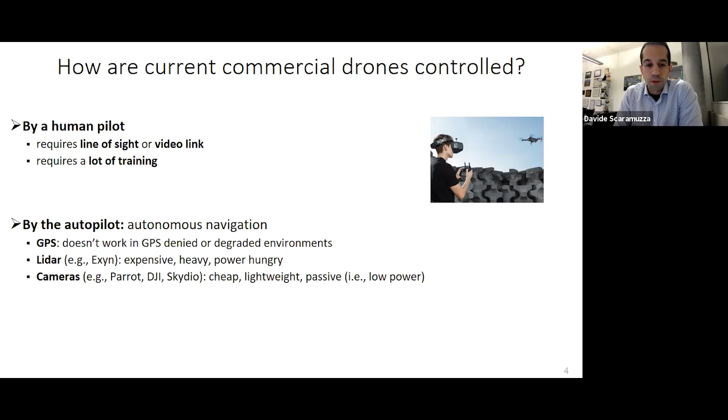That's the reason why over the past 10 years I've been working on vision-based autonomous navigation of drones. One of the most important things for us researchers is to find a passion that drives our research.

My motivation to work on autonomous flying robotics has always been to build machines that can one day be used to autonomously search and rescue people in the aftermath of a disaster. I'd like to do this for two reasons. First, because I come from the center of Italy, a region mostly impacted by earthquakes in past centuries. Second, because I consider search and rescue robotics one of the toughest fields in robotics.

Another important thing about search and rescue robotics is that it's very important to fly as fast as possible, for two reasons. First, because any time wasted can be fatal for the victim. Second, by flying faster, drones can cover more search area within their limited battery life.

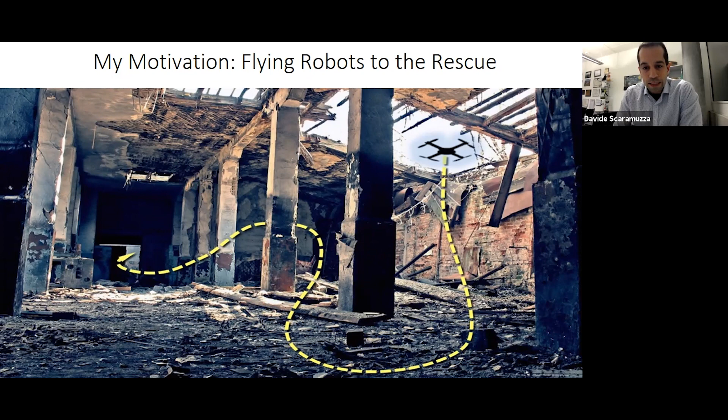Flying fast is actually the leitmotif of this talk, which is about agile flight. But before I go into the details, I want to review a little bit the last 10 years of progress on autonomous vision-based agile flight.

The first demonstration of autonomous goal-directed navigation of drones, non-reactive, using onboard sensors and computation, was done within the European project S-Fly, which I had the pleasure to coordinate. At that time we were flying very slowly. Here you see Laurent Kneip acting as safety pilot in case something goes wrong, using a fishing rod to safely secure the drone.

At that time we were running the computation off board on a laptop computer placed on the floor of the gym, and we used an onboard camera streaming images via a 20-meter long USB cable. That was the first demonstration of visual SLAM-based navigation of drones, between 2009 and 2010.

Then what happened? In 2015, DARPA launched a full program on fast and lightweight autonomy using only onboard cameras and computation, called DARPA FLA, fast lightweight autonomy. I was fortunate to be part of this program, in the team led by Vijay Kumar from UPenn. Within the FLA project, we demonstrated the first high-speed autonomous flight, up to 10 meters per second.

Where do we stand today? So today, in 2020, autonomous vision-based navigation has become a standard tool in several products, such as the Skydio drones, the DJI drones, as well as in the NASA helicopter just sent to Mars, supposed to land there in February next year. We are living in very exciting times.

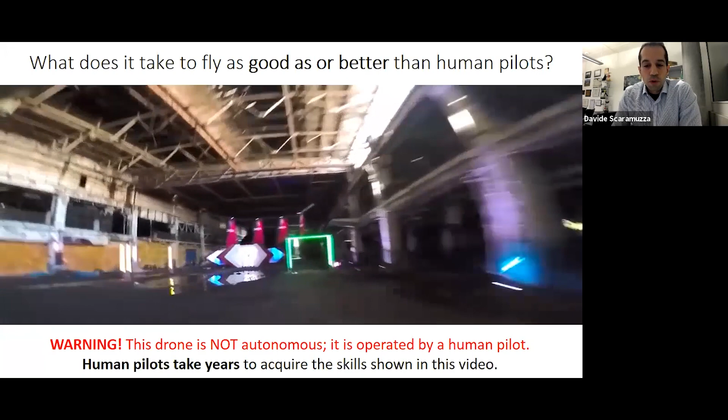But at the same time, as a researcher, we need to ask: what is next to do for us? I think the next challenge is to make autonomous drones fly as good or even better than human pilots. If you look at the performance of autonomous drones today, they are still far from the performance of human pilots in terms of speed, versatility, and robustness.

Look at this video, for example. Human pilots take years to acquire the skills you see here. This raises the question: can we build an alpha pilot that can fly drones as good or even better than human pilots? This is both my dream and the goal of my research lab.

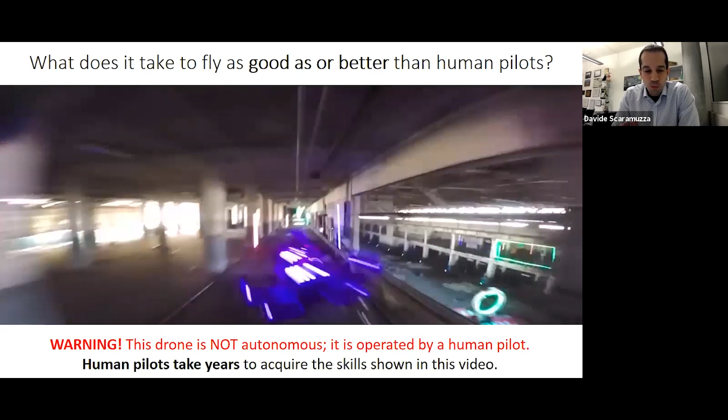And if we are successful, one day I would like to demonstrate a drone that can beat the best human pilot at drone racing competition, as well as in acrobatic maneuvers.

But you may wonder, why bother about agile flight? Why does it matter to us all today? Well, if drones can fly faster, it means they will be able to cover longer distances. Drones at the moment are very limited by their battery life—they can only fly for 10, 20 minutes, which restricts their use in many applications.

By making drones faster, the hope is that they will be able to fly longer distances in the same time. This is crucial for many applications that matter to us all today, like search and rescue, delivery, and inspection. But there's an additional reason: agile flight is, in my opinion, a really difficult problem to solve because it raises fundamental challenges for robotics research in terms of perception, planning, and control.

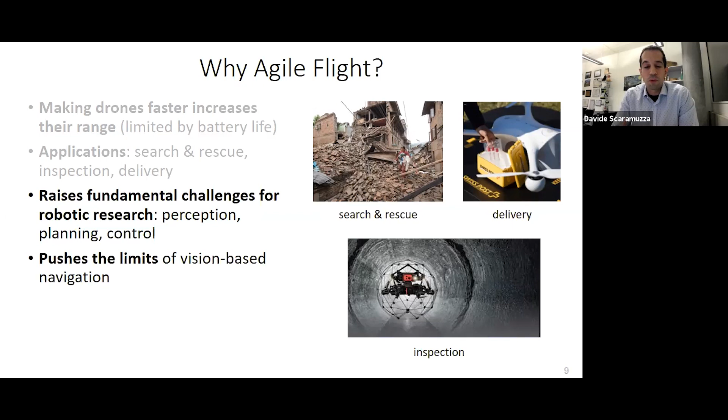After all, our goal as a community is to push the limits, and I think that to push the limits, we really need to work on really hard stuff. So at my lab, we want to push the limits on vision-based navigation. I think agile flight is one of the most exciting, but also one of the hardest challenges for robotics for the next decade.

Of course, there has been plenty of related work on agile flight. A very good exercise when you approach a new field, and this is actually a message for young PhD students, is to try to plot all the research papers on several axes. Here I chose speed and agility on the horizontal axis, and prior knowledge or use of external sensors on the vertical axis.

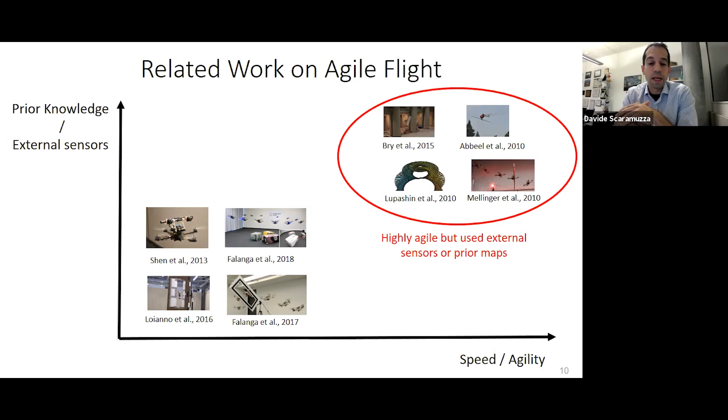If you look at the early works on agile flight, just to mention a few, there's the pioneering work by Andrew Ng and Pieter Abbeel on using reinforcement learning for acrobatic helicopter flight, the work by Bry and Nick Roy on flying a fixed wing in a garage, and the work by Lupashin and Raffaello D'Andrea, Daniel Mellinger and Vijay Kumar. The common denominator between all these approaches is that, yes, they were very agile, but they used external sensors or a prior map.

On the other side, more recently, in the past five to seven years, we have witnessed the rise of onboard sensor-based autonomous agile navigation. However, if you look at the performance in terms of agility, this is actually smaller than the agility that can be reached using external sensors or prior maps.

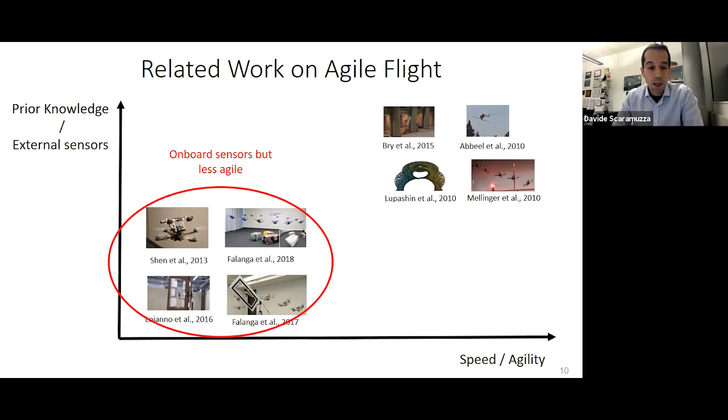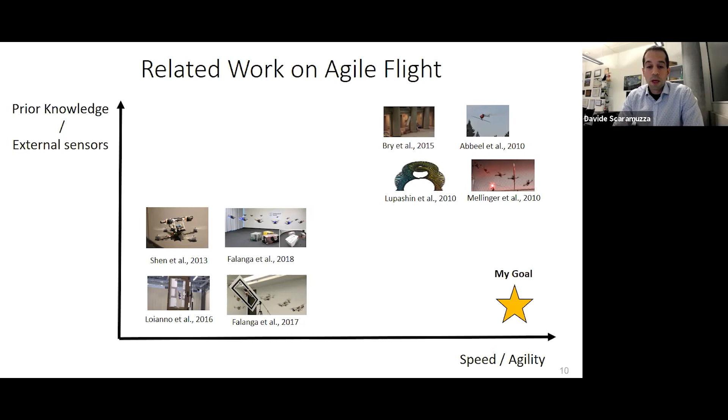So where do we want to stand? We want to stand basically at the bottom right of this plane: a system that is super agile in the future and also uses as little prior knowledge as possible, only using onboard sensors. That's the goal of my research, and also what I think the goal of the community should move toward. However, to achieve this goal, there are many challenges to work on.

Here I'd like to summarize the research challenges that I'm working on, but also that the research field is working on. Last week we organized the 6th International Workshop at IROS on autonomous agile vehicles, among which drones, and we identified these as the key research topics to address at the moment.

The first research problem is coping with inaccurate models of the sensors, of the actuators, of the environment, and physics. One solution is, for example, tight coupling of perception and action. This is a solution to this problem, but it also becomes a new research challenge, because how can you do it well?

Another problem is reducing latency, because if you want to fly faster, we need faster sensors and algorithms. Regarding faster sensors, there is now a plethora of novel sensors like event cameras and focal plane sensors like the SCAMP, which offer new opportunities. There are also new actuators that promise to lower the time constant compared to standard actuators and have much more efficiency.

There's also another big challenge: if you want to work on agile robotics, you're going to destroy a lot of robots. This is important, otherwise the field cannot progress. But if you destroy robots, it means your work is going to be very expensive and you're going to need a lot of engineers. It's also very unsafe, because you could destroy the environment and potentially hurt yourself and your research. So we don't want to do that.

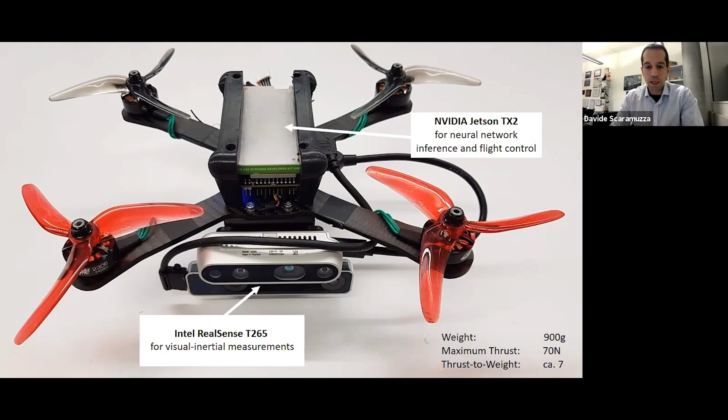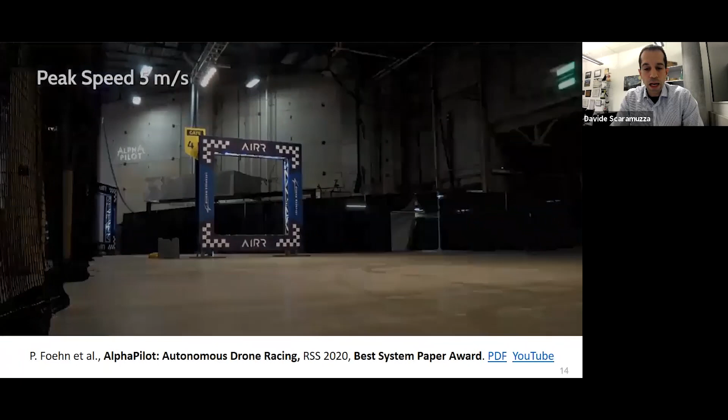Let's now move on to the first topic, autonomous drone racing, starting with a video. In autonomous drone racing, a drone has to autonomously navigate a race course consisting of several gates in the least possible time. What you see in this video is our drone's performance in the 2019 AlphaPilot Drone Racing Challenge, where we ranked second among 400 participants worldwide. Our drone was reaching peak speeds of up to 5 or even 8 meters per second in some cases.

Now, how does autonomous drone racing actually work? It consists of two steps. The first is to plan a global trajectory that minimizes execution time from start to finish - we call this the minimum time global trajectory. The second step is to execute this optimal trajectory, and executing it as accurately as possible is actually the hardest step, because any deviation from the optimal trajectory will cause the drone to underperform.

What are the main causes of these deviations? Mostly drift in visual odometry or visual-inertial odometry, and inaccuracies in our models of the actuators and of the environment. Because of this, it's very important to tightly couple perception and control. This is often said at conferences, but what does it actually mean to couple perception and control, and why is it so important, especially for drones? In fact, it's less important for self-driving cars.

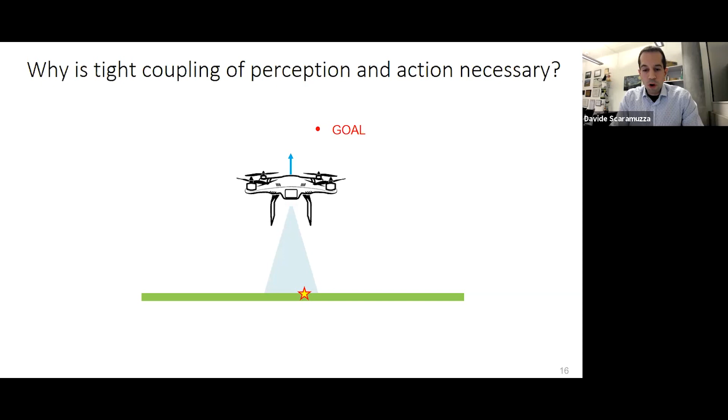Look at this very simple toy example. Consider this drone - assume it's a vision-based drone localizing itself with respect to some point of interest, denoted here by the yellow star. If this drone wants to reach a certain goal position, it has to point its thrust vector toward the goal. However, by doing so, it has to rotate, and by rotating, it loses visibility of the point of interest - the features it was using to hover, if that was the task.

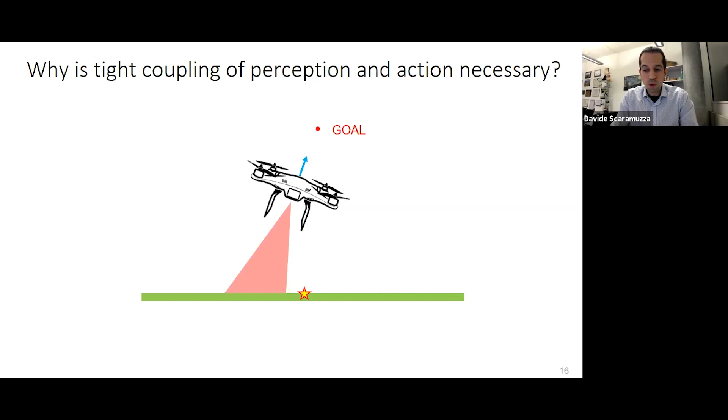So to solve this issue, we need to create a synergy between the perception and action loops - what we call perception-aware planning and control. This is super important. We humans do this all the time - when you grab a cup, when you pass through a door - but it's less obvious for robots. This perception-planning-and-control coupling is even more important for drones, because they rely on visual cues in order to navigate.

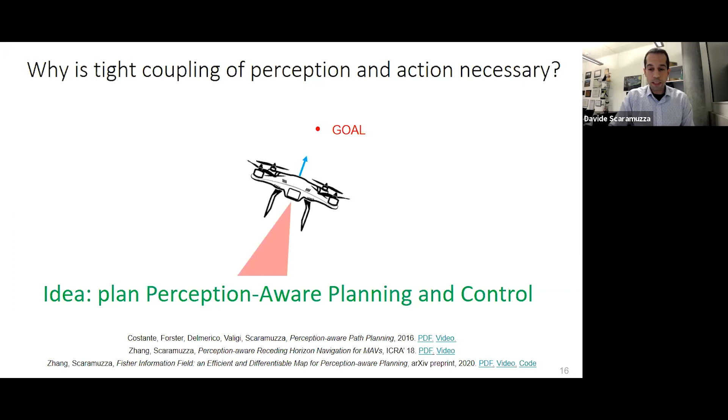Now, how can we solve this? We've been working on this perception-aware navigation for quite a lot of time now. One of the most important things is to use a tool that can already bridge some gap. So we decided to exploit model predictive control because it's a tool that allows you to bridge the gap between planning and control.

What we actually did is adapt model predictive control in a way to make it perception-aware. How did we make it perception aware? We combined some classical action objectives with some perception objectives.

What are the action objectives? They are, for example, to follow a given reference trajectory and stay as close as possible to it, as well as to satisfy the under-actuated system dynamics and respect the actuator's limits in order to not saturate the motors.

Perception objectives are, for example, to maximize the visibility of a point of interest. If you navigate through a track in drone racing, you want to constantly look as long as possible towards the next gate. But you also want to minimize its motion blur, so there is something to do on the image plane as well.

So here we define the perception objective. In this case, we want to minimize the projection of the center of a gate's distance from the center of the image, but we also want to minimize its optical flow speed, because by doing so we hope to minimize the motion blur.

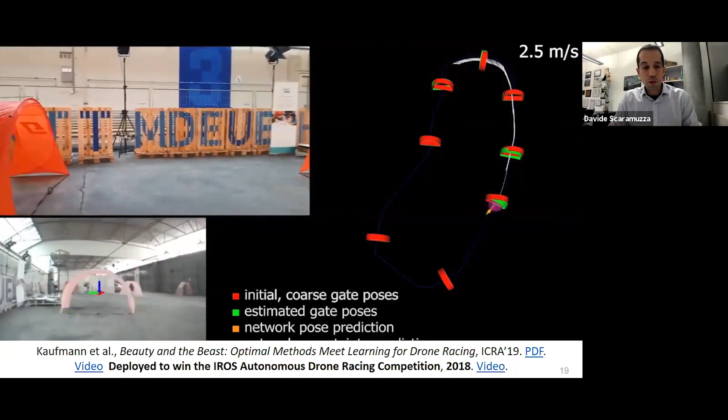Now let's move to the real-world results. This is already impressive to see: our policy trained in simulation was able to generalize to an unseen real world, which is exactly what you see in this video. So what do you see here? First, on the top left side, third-person view, you see our drone navigating a bit slowly here on a racing track.

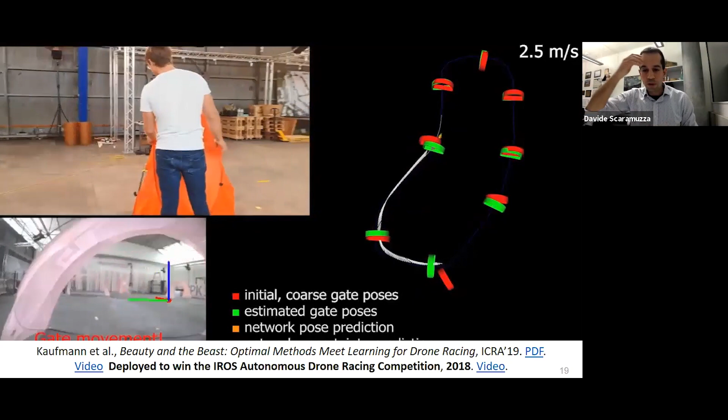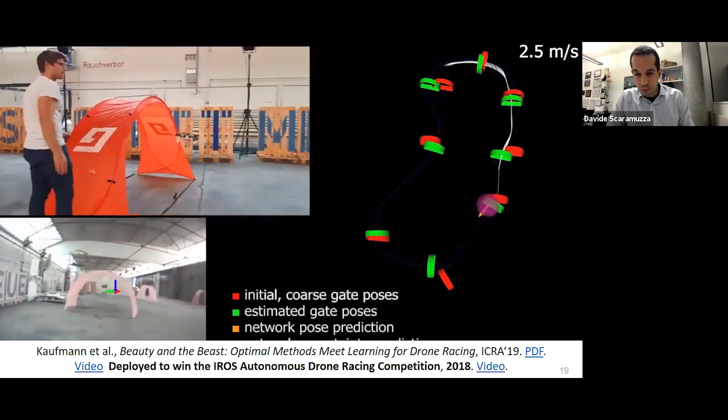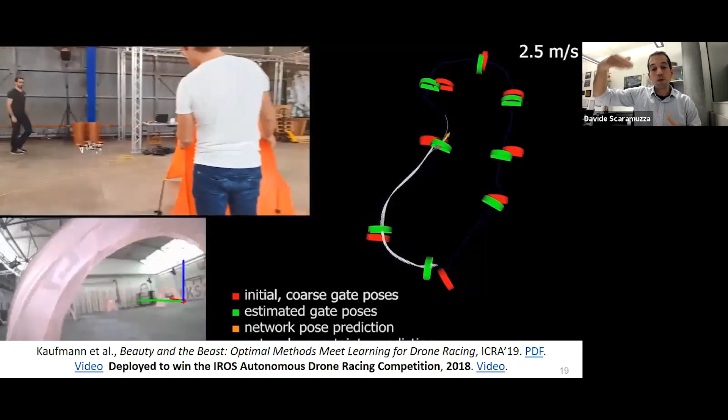What you see on the right is actually what is happening in the background. You see in green the predicted gate poses from the neural network, together with their covariance, marked in purple. As the network exits a gate, the covariance is pretty big because you are far away from the gate you're trying to predict. But as you approach the next gate, the covariance shrinks, which is in accordance with our intuition.

What are the red gates? The red gates define the prior map.

So the point is that we have a Kalman filter that fuses optimally the information coming from onboard visual inertial odometry with the position of the gate poses coming from the neural network. And then we have the perception-aware model predictive controller that executes the trajectory, making sure that at each instant of time the quadrotor looks at the next gate.

So it's perception-aware. What you saw on the bottom left video is basically the first-person view, and those three axes represent the projection of the relative pose of the gate into the camera view.

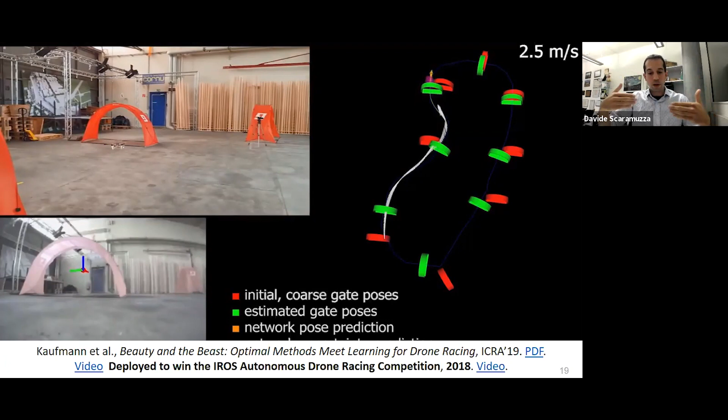Okay, now I want to move to another research topic that we're working on, which is how to perform autonomous drone acrobatics. Remember my big dream was also to make a drone able to get closer to the performance of human pilots, also in terms of acrobatic maneuvers.

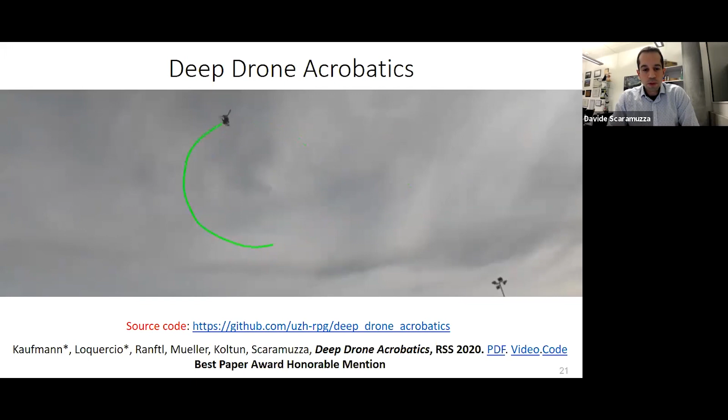This is work that I did in collaboration with Vladlen Koltun's group at Intel, published at RSS this year. In this paper we show deep drone acrobatics. We showed for the first time that a vision-based quadrotor with only access to onboard sensing and computation is capable of flying acrobatic maneuvers with accelerations of up to 3G, close to what the best human pilots can achieve.

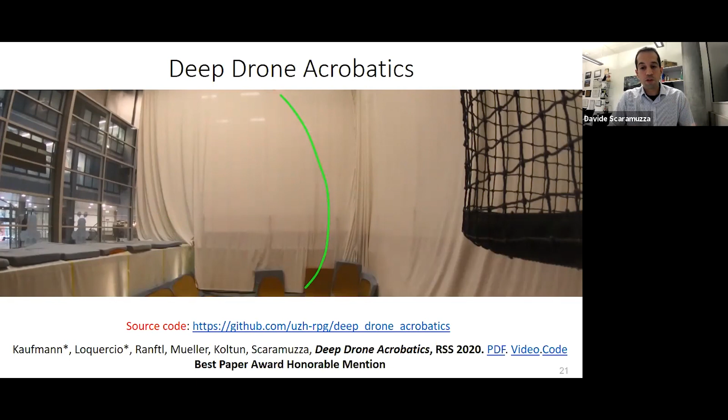Previous researchers had attempted these acrobatic maneuvers, but they only succeeded using either GPS or motion capture systems. To the best of our knowledge, this was the first work done using onboard sensors and computation. Now, the traditional approach to control drones typically relies on separation of state estimation, planning, and control. This is not the approach we opted for in this work.

Why is that? There are 5 reasons why we opted to learn an end-to-end sensory motor control policy. First, if you use the traditional architecture, these modules—state estimation, planning, and control—are usually designed individually rather than conjointly, co-designed. There are problems with this, which I'll explain.

Second, these modules run consecutively rather than concurrently, while we know that in nature perception and action, as I said before, are actually coupled. Additionally, this modularity introduces latencies.

Third, each module is sensitive to errors in their internal models of the sensors, actuators, environments, and physics. This means small errors in each module will negatively affect performance in each subsequent module. Fourth, this architecture requires extensive tuning, especially for the control gains, especially at high speed.

This is much more relevant in the task of acrobatic maneuvers. And finally, fifth reason, it requires extensive expertise by the code developer, also called domain knowledge. To recap, all these problems I mentioned are detrimental for very fast and agile flights, such as drone acrobatics.

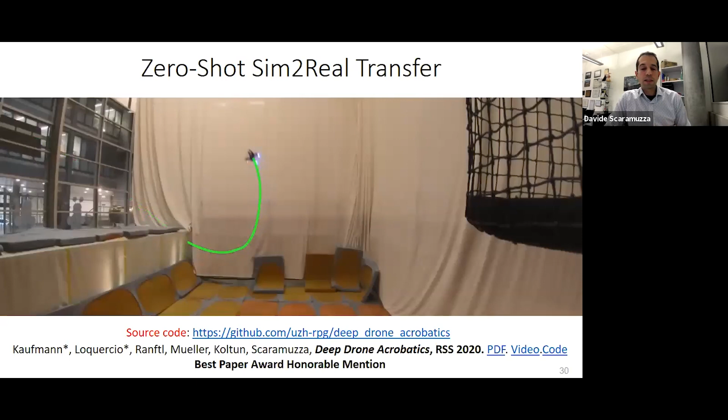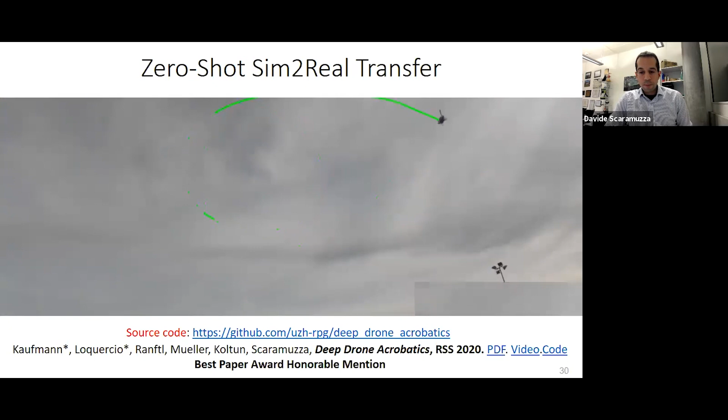In conclusion, our policy was able to generalize to different indoor and outdoor environments, but also to different physical drones. I would like to add that, thanks to this learned controller, we were able for the first time to demonstrate such agile acrobatic maneuvers fully autonomously with onboard sensors and computation. By the way, these maneuvers are also super difficult for human pilots, who take months to actually learn them.

So what are now the main takeaways of learning versus model-based controllers? To recap, so far I presented two tasks, autonomous drone racing and autonomous drone acrobatics, which relied on different approaches: a model-based controller for the task of drone racing, and a learning-based controller for the task of drone acrobatics. In this slide I want to summarize the key takeaways for robotics research.

In contrast to model-based approaches, I think learning-based controllers are more robust to drift in state estimation, do not require any tuning, and are also very easy to code. On the other side, I have to say that they offer poor generalization performance and are also difficult to interpret, and this is a general problem with networks in general. Therefore, I think future research efforts should focus on how to best combine the benefits of these two worlds.

Now, as you learned in this research, we used extensively simulation. What type of simulator did we use? We used actually a mix of Gazebo, Bullet, and the Unity engine, and we decided to gift this to the community. The simulator we use is called Flightmare, and it was just released open source a few weeks ago.

Flightmare is basically a new photorealistic quadrotor simulator, specifically meant for quadrotors, that is compatible with ROS, Gazebo, OpenAI Gym, and Bullet. It provides interfaces for easily configurable objects, high fidelity sensor suites, 3D point cloud extraction, and it's also compatible with virtual reality hardware such as the Facebook Oculus Quest, which I think nowadays is also important to keep into account. I hope this simulator can be beneficial to the community and can also incentivize the community to perform better benchmark comparisons and organize competitions for the future, because we need reproducibility in the research results. So it's very important to develop new and accurate simulators.

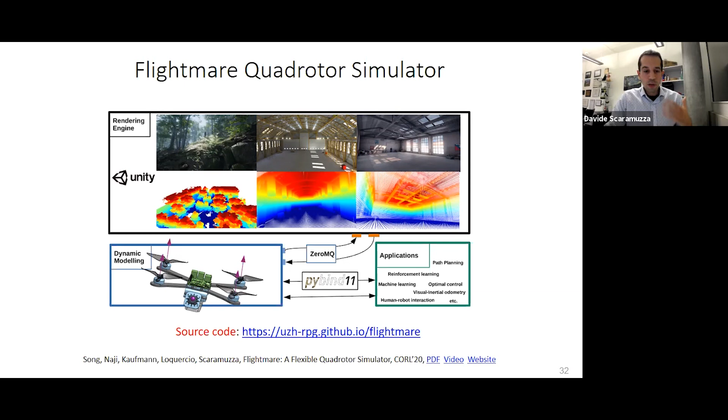I see that I still have a few minutes left, so now I will dedicate the remaining 5 minutes to the final task, which is low latency sensing.

Now, it turns out that nature, animals, humans don't use frame-based cameras, but we use a different type of cameras, more event-driven cameras, if we can call them cameras, in fact.

So if you look at the past 60 years of research in computer vision, this has been devoted to frame-based cameras, but I argue that they are not good enough. This is because they suffer from high latency and also low dynamic range.

There is something to say about latency, which is that latency depends on the exposure time of the camera. So in low-light conditions, the exposure time can be over hundreds of milliseconds, which greatly limits the achievable agility of a drone. Additionally, standard cameras also suffer from a low dynamic range, which can be reduced if you use a high dynamic range camera.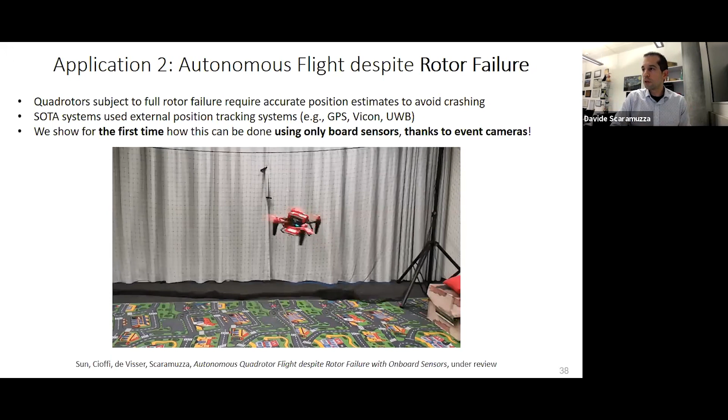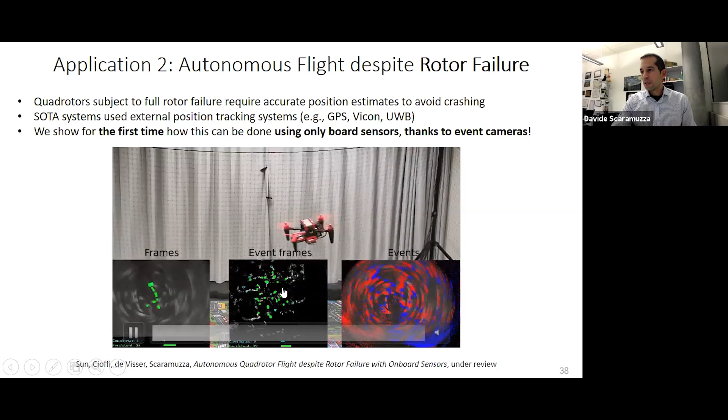You see here the quadrotor. We stopped one rotor, so now it's only using the other three. The co-authors of this are De Visser and a PhD student who was visiting me. You see on the bottom left what a standard camera would see, super motion blurred. You cannot do anything, so the drone will crash. Here you see the events in the middle, the event frames, where basically we extract features, track them, and then we can reliably do state estimation thanks to Ultimate SLAM.

So we finally were able to show that we can actually solve this problem. Here we also show that we can follow a given trajectory.

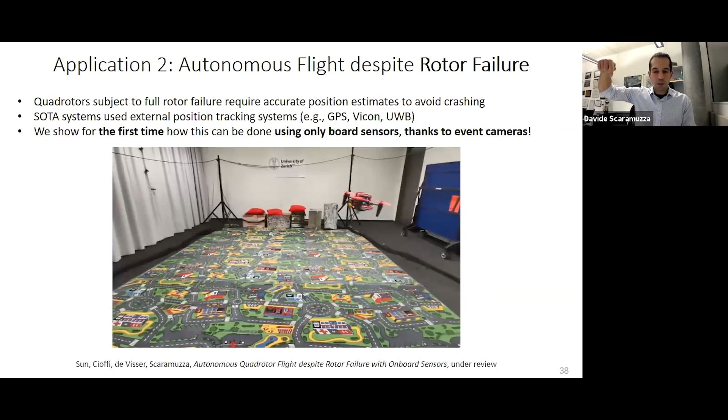I'm about to close. Another application I want to show is very recent work on low latency, high bandwidth control. Do you know those YouTube videos where you see a chicken moving in front of the mirror, and if you move the chicken, the head remains stable? It's as perfect as, how's it called, a steady controller, camera stabilizer.

So here we try to do something similar using a dual copter. The dual copter is constrained to rotate around an axis parallel to the optical axis of the camera. We have an event camera installed here. This is a dual copter with two propellers, and we are trying to mimic the rotation of this disk. So my student is going to rotate the disk.

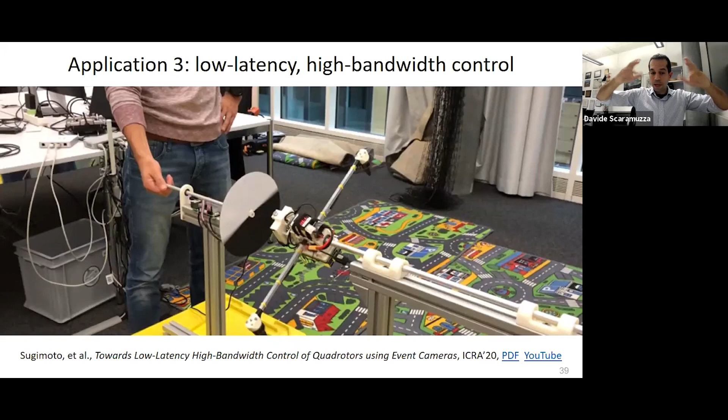What we want to see is if, thanks to the low latency of the event camera, we can actually mimic the behavior of the passive disk with no perceivable latency. Let's see, I hope it plays. This is pretty aggressive, actually, so I don't know if it plays well and smoothly in Zoom.

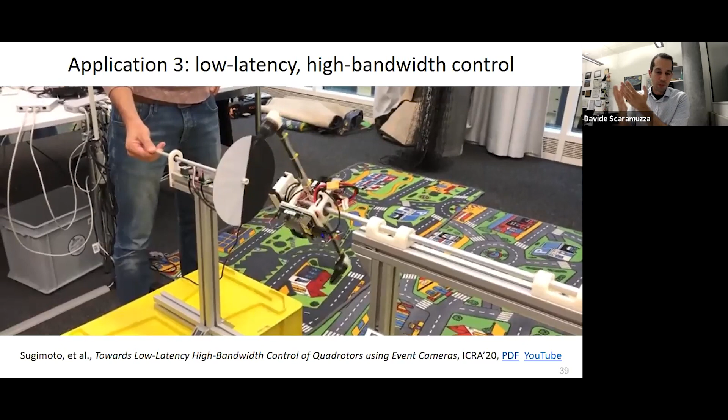But there is some latency, though it's actually due only to the time constant of the actuators and to the inertia of the system, by the way. Because here the state update comes at 1000 Hertz, and we have an event-based Hough transform that does the line detection.

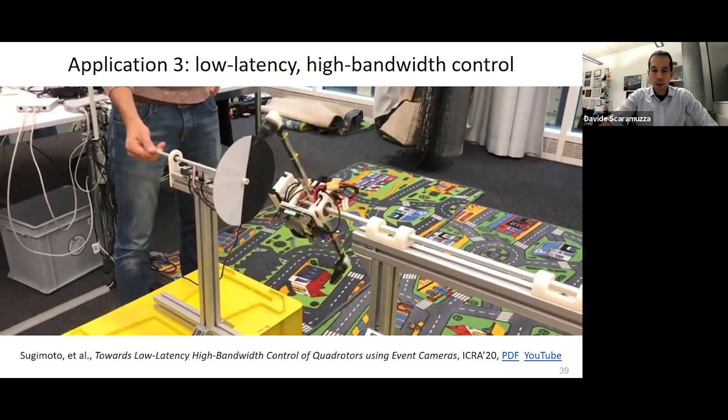Now, where are we going? Where do we want to go? We applied this low latency control to the task of dynamic obstacle avoidance, where we showed, in a Science Robotics paper that appeared this year, that for the first time we could actually avoid objects aggressively thrown at a quadrotor while the quadrotor was actually moving.

We show in this paper that we can achieve a visual latency of 3.5 milliseconds, with relative speeds between the ball and the quadrotor of up to 10 meters per second.

Now you don't need to do that because the stream of information from an event camera is continuous. What you can see here is the space-time signal recorded by the event camera. And what we do is apply a method called contrast maximization that allows you to warp the events according to the direction of motion that generated them. And if you do that, what you get is the resulting image.

It's sharp in correspondence of static background events, and it's blurry for events that were generated by moving objects. So we have a simple algorithm to tell apart moving from static objects. That's one of the opportunities of event cameras.

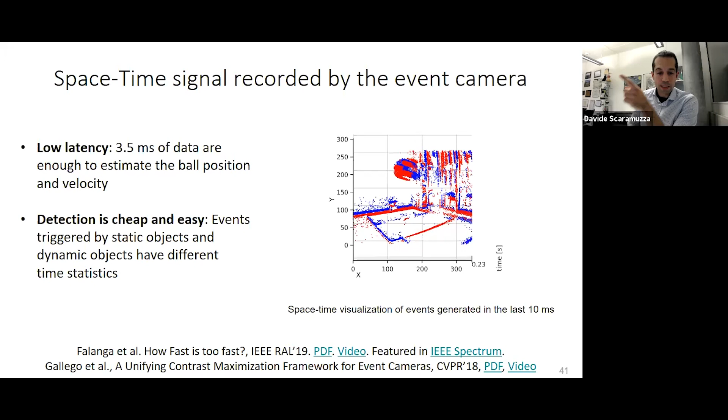We also have a paper where you can actually learn that, done in collaboration with Aloimonos and Fermüller from Maryland. This takes me to the conclusion.

So remember the umbrella of this talk. This talk was about autonomous vision-based agile flight as a new research topic. I believe it will take at least 10 years to solve it, if we will ever solve it. It's important because it raises fundamental challenges for robotics research, and also pushes the limits of existing algorithms in extreme conditions. I also talked about the importance of tight coupling between perception and action loops.

I also talked about learning versus model-based policies, and I think combining model-based and machine learning methods can greatly boost the performance, but the important question is what should be learned, what should be modeled. I also talked about event cameras, but more in general, we know that new sensors hold promise to push performance and also bring new interesting problems to solve.